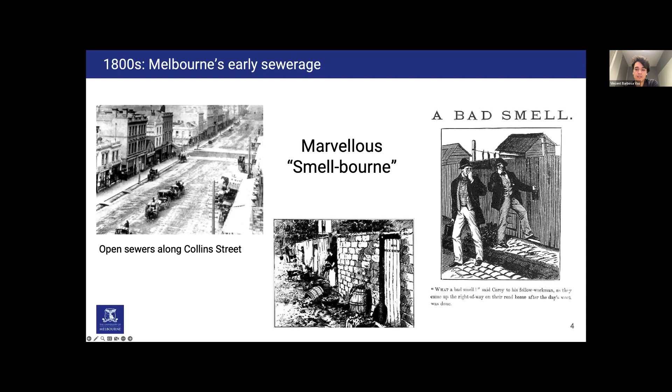Back in the 19th century, you wouldn't want to be living in Melbourne. Restrooms were located at the back of the garden, with a door that opens on the lane, and wastewater was directly dumped on the streets, creating the not-so-pleasant nickname of Smell-bourne. In fact, you can actually find the relics of these doors when you walk through the multiple lanes of Melbourne.

So Melbourne understood this problem, and in the 1800s, they tried to remediate it. We started to see thunder boxes, an early form of toilets located at the end of the garden. These boxes contained large buckets, which were accessible from the laneway by the nightmen. The nightmen started their job after dark and collected wastewater from the neighborhood.

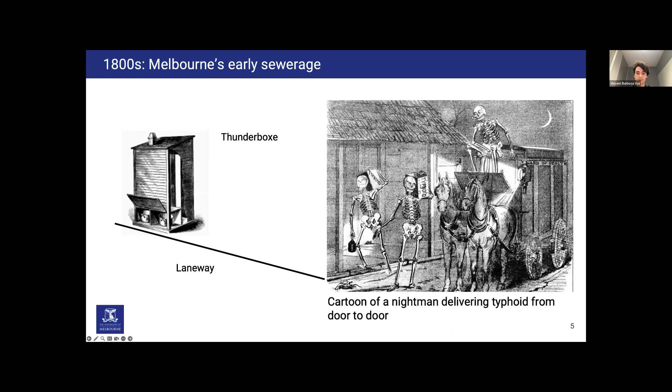While the nightmen helped keep cities safe from diseases like cholera or typhoid, they had a bad reputation. So despite the hard work, the disease would still spread, and this issue was attributed to them. Finally, in 1897, the All England Eleven Hotel became the first property to be connected to the sewage system, therefore putting an end to Smell-bourne, and Melbourne becomes marvelous again.

So I hope you now have a better understanding of the importance of a good sewage system.

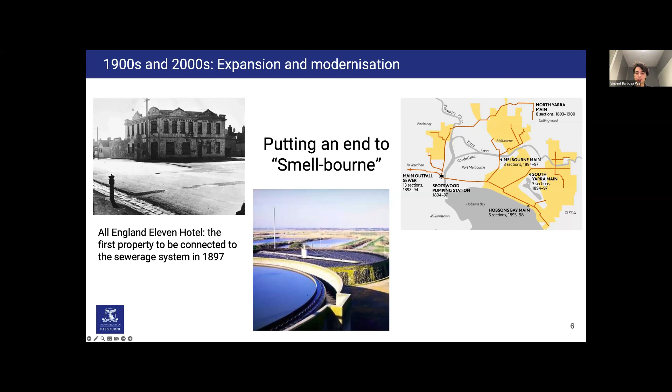There are two main types of sewage networks. The most common is gravity-fed. In a gravity-fed network, the wastewater from individual properties is carried along the main pipe to the treatment plant. Usually properties are located uphill and gravity does the job.

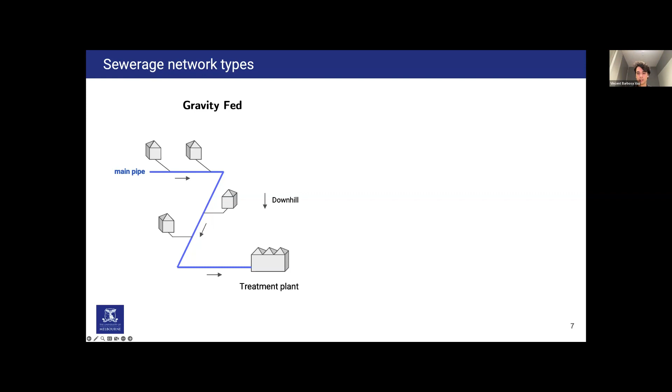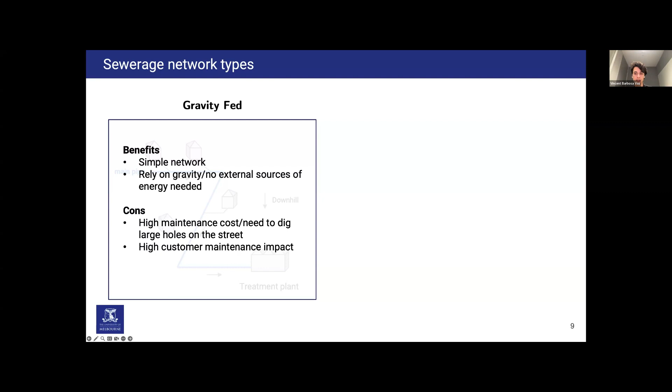Gravity-fed networks have many benefits. They are the most common type of network, and therefore well understood. They are also simple to operate, so as long as there is a slope in the right direction, gravity systems run themselves. However, they have high maintenance cost, as operators need to dig large holes in the street to repair broken or blocked pipes. This maintenance has a big impact on customers, as a large portion of the street needs to be closed.

The second type of sewage network is based on the pressure sewer system. A pressure sewer system is a network of pump stations used to collect and manage sewage from individual properties. Pressure sewer systems are used in areas with challenging topography, where the landscape is either very hilly or very flat, and in areas with regular flooding, or where it's impractical to install other types of sewage systems.

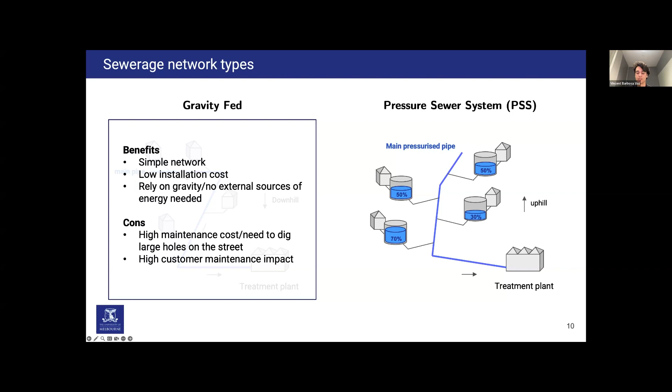Pressure sewer systems have a lower maintenance cost, as we need to dig smaller holes in the street. They also have a lower installation cost, as pipes can be smaller and buried shallower. They can be installed in challenging terrain, and they can easily be expanded. However, they are much more complex to operate than conventional gravity networks.

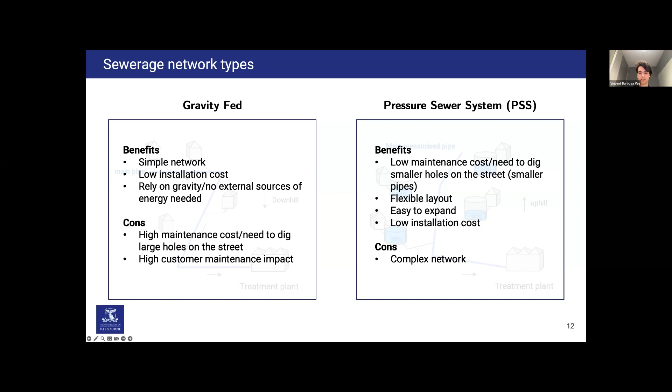In this talk, we're going to focus on the second type of network. The system is composed of a tank that is typically buried at the back of the house and connected to the main network in the streets. There's a controller that activates the pump located at the bottom of the tank.

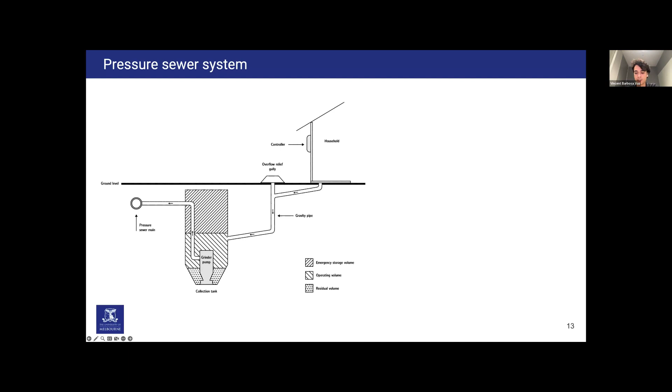In standard control systems, we simply wait until the tank reaches capacity and we begin pumping out. The wastewater goes into the tank, and when it reaches the set point or maximal level, it triggers the pump and we start pumping out. The wastewater is flushed into the main network until it reaches the minimal level and the pump turns off. We observe this cycle throughout the day.

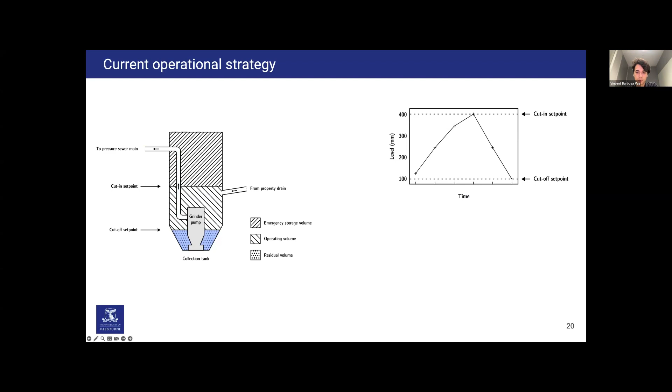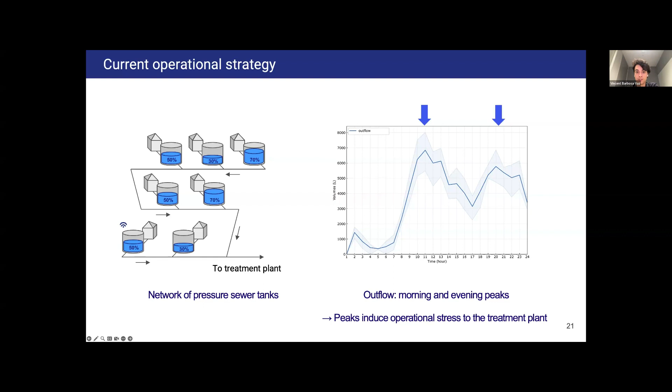Such simple control leads to peaks in sewage flow in the morning and evening, corresponding to peak water usage in the properties. Sewer systems are always designed to handle the highest peak flow projected in the network. Therefore, reducing the highest peak flow allows for smaller pipes, smaller treatment plants, and less chemicals used during the treatment process. There's a huge incentive to reduce the highest peak flow.

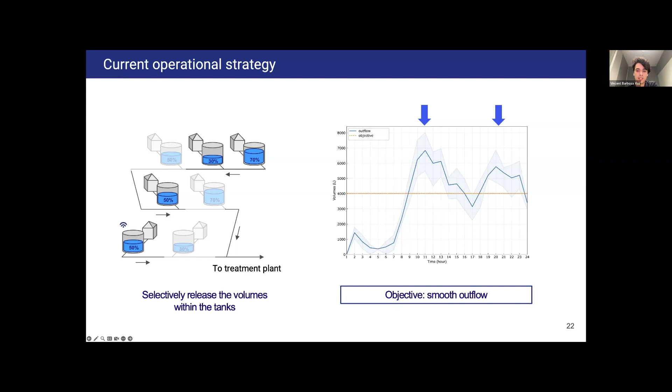So we formulate the following problem: can we selectively release the wastewater within the tanks at strategic times, such that the total output flow is smoothed out? In other words, we want to determine the times at which each tank should be emptied so that the highest peak flow is minimized.

To determine the times at which the tanks are flushed, we first need to determine the input flow - what and how much goes into the tank. We want to roll back all the previous pumping decisions that were made using the simple policy to retrieve the original input flow.

The tanks are equipped with sensors that measure the level of wastewater within the tank. Therefore, the amount of wastewater in the tank corresponds to the difference of two consecutive positive readings. We discretize the inflows into hour-long time steps so that we can solve this problem using an optimization model. We chose an hour-long time step as we don't observe any overflow for the selected tanks.

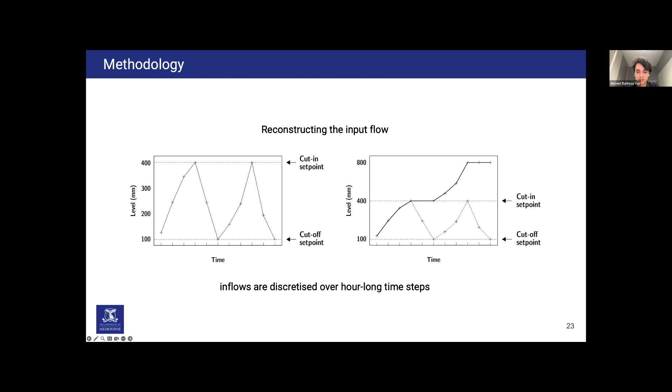We formulate a first MIP model. The level in the tank at time t corresponds to the level in the tank at time t-1 plus the inflow times our decision variable x: do we empty the tank or not?

We add a constraint such that the capacity of the tank is never exceeded. And we add a constraint to prevent wear and tear of the pumps by pumping out a minimal amount of wastewater.

In practice, such a model doesn't scale well, because for a large number of tanks, the solution space is very large, and the constraints require exploring a large portion of the solution space.

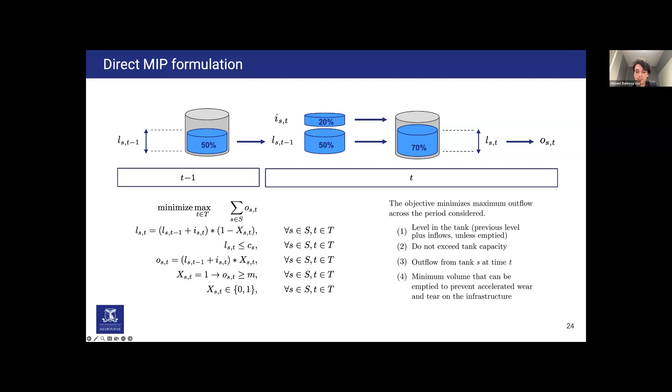So we move to a packing formulation. We can visualize the inflows as a stack of blocks that have a start time and height corresponding to the time and amount of wastewater entering the tank. The time steps correspond to the knapsacks, so each block can be packed in a knapsack during the time it is available.

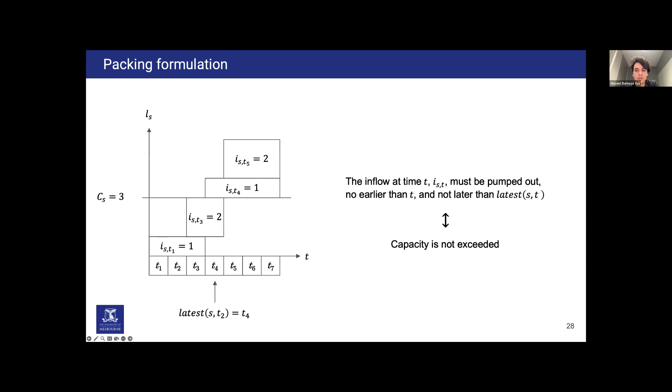We add the capacity of the tank - here it is equal to 3. We define 'latest' as the time at which the inflow must be emptied before exceeding capacity, so this can be easily pre-computed. Here, inflow 1 must be emptied before time 4. Similarly, inflow 2 must be emptied before time 5.

So during the search, we decide to empty the first inflow at time 3. So we define the following new constraint.

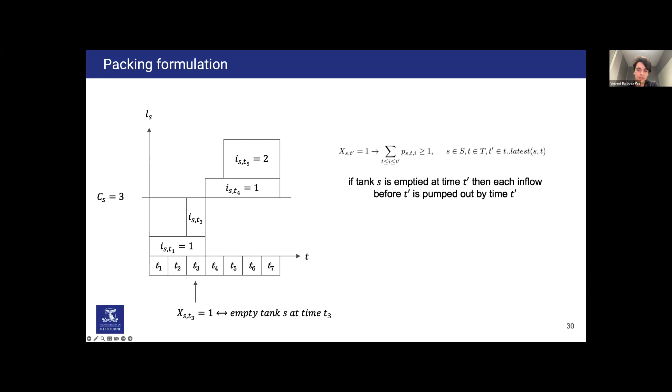If tank S is emptied at time t prime, then each inflow before t prime must be emptied by t prime. So from a physical point of view, we cannot have wastewater in 2 stages that is flushed out and that is remaining in the tank.

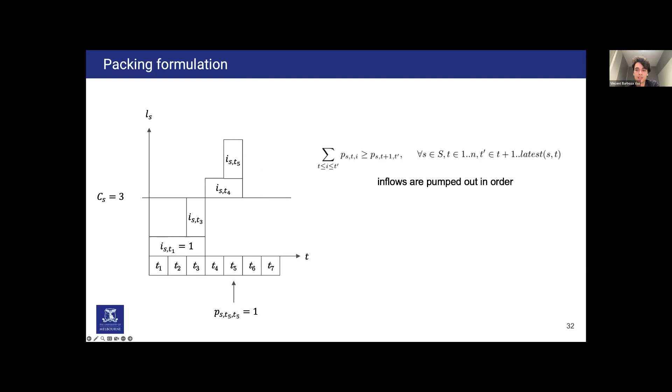Again, from a physical point of view, we cannot have inflow 4 being pumped out after inflow 5. So we define the following constraint to enforce that inflows are pumped out in order.

So far we defined a policy for pumping out. Because our decisions are made on predicted inflows, we observe a difference in the pumping out decisions based on the actual inflows.

The decisions are automatically revised by the controller that only accepts feasible decisions. That is, the system won't activate the pump if the tank is empty, and it will activate the pump if no decision for pumping out was generated. This corresponds to the normal controlling method.

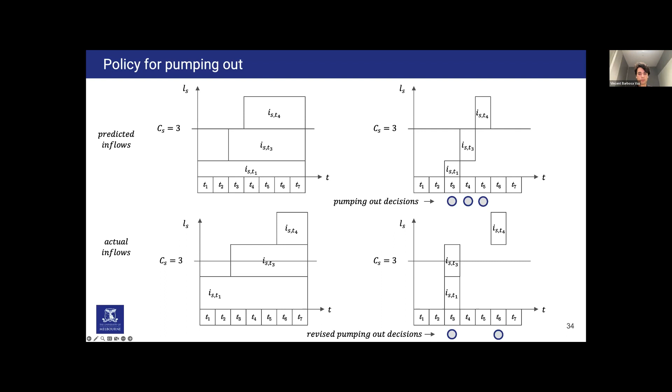We then define a set of non-predictive strategies. The first one corresponds to the current operational strategy, and that is our baseline. So a tank S is only emptied when it reaches capacity.

We also define a second strategy, that is we empty each tank as soon as it has more than the minimal capacity.

We also define a random strategy. So we compute the proportion of pumping out for each of the tanks. We flip a coin, and if we are below this proportion, we empty the tank.

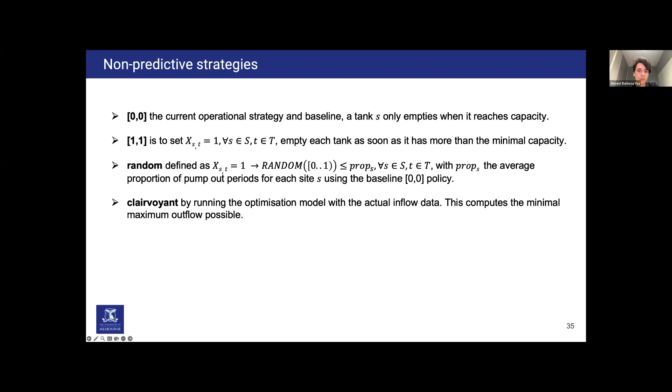And we also have the clairvoyant strategy, that is running the optimization model with the actual inflow data. So that is our target, which is the minimal maximum outflow possible we can get.

For the predictive strategies, we first use complex predicting models to generate plausible inflows. The issue with such models is that they tend to the mean and they do not accurately represent the underlying optimization problem that follows. So we lose the crucial information, which is the time the flow is peaking.

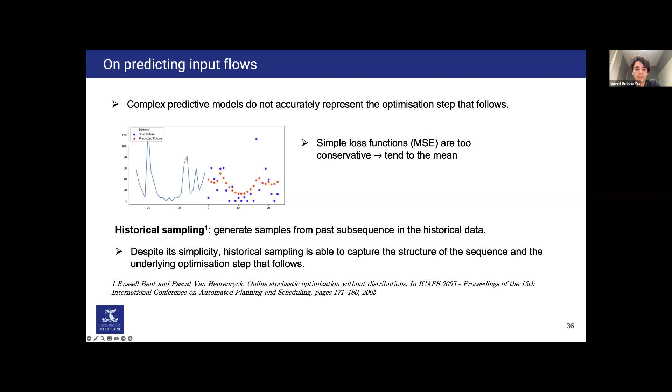Instead, we use a simple predictive method, which is historical sampling, by generating subsequences in the historical data. So we consider a sampling window, for example 7 days here, and we use one of the samples as our forecast.

We also define a robust strategy as the worst case scenario for the sampling window, which uses the maximum inflow for each time period over the sampling window.

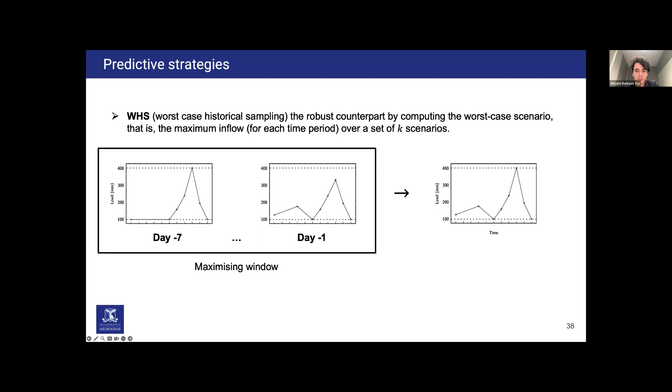So we use real data from our industry partner, and this corresponds to around 4,000 tanks. The prediction difficulty here is that we are considering a holiday area, so there's a huge fluctuation in water usage per household when people move from house to house.

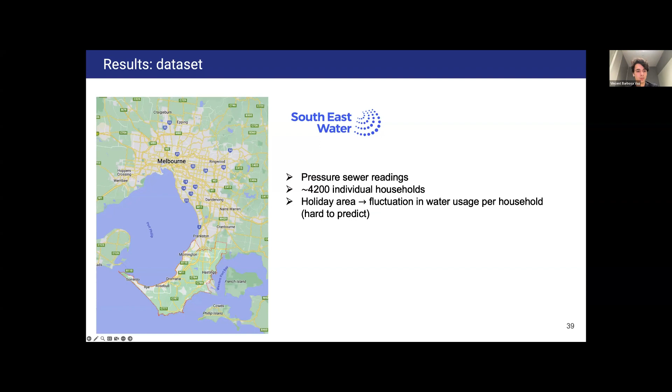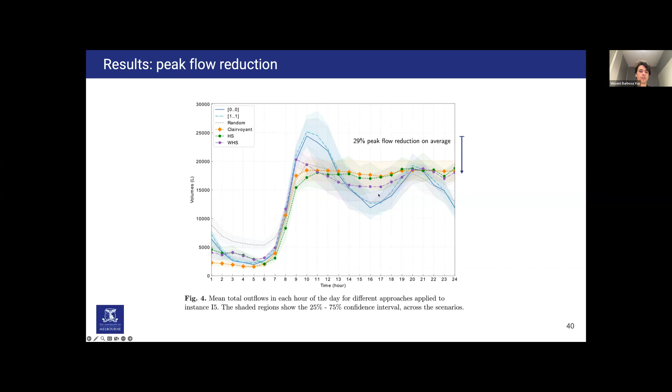So here are our results. In blue, you have the baseline strategy and the alternative strategy. And we can see that in orange here, you have the clairvoyant, so that's our target. Our method managed to considerably reduce the peak flow.

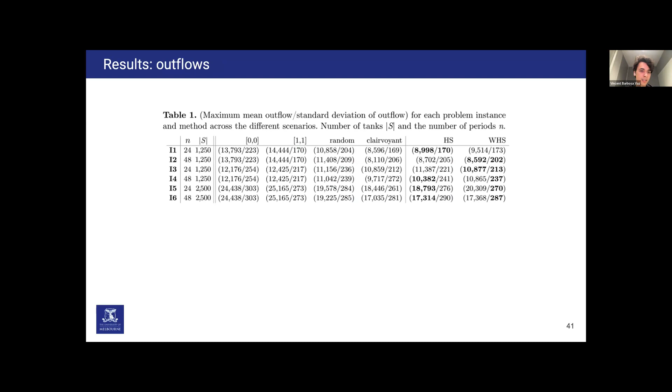So here are the results in more detail. We have the maximum mean outflow and the standard deviation outflow for each of the strategies. And we can see that there's a considerable reduction in peak flow available compared to the current baseline.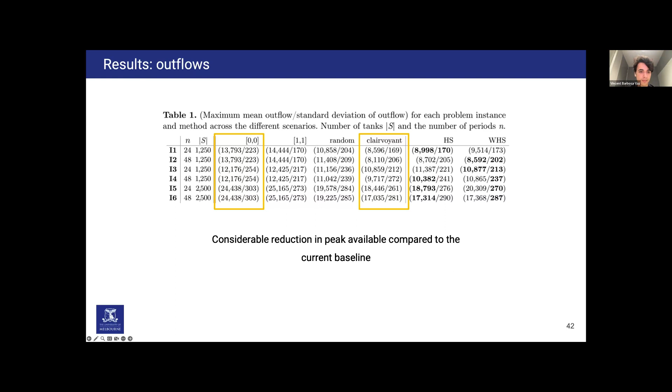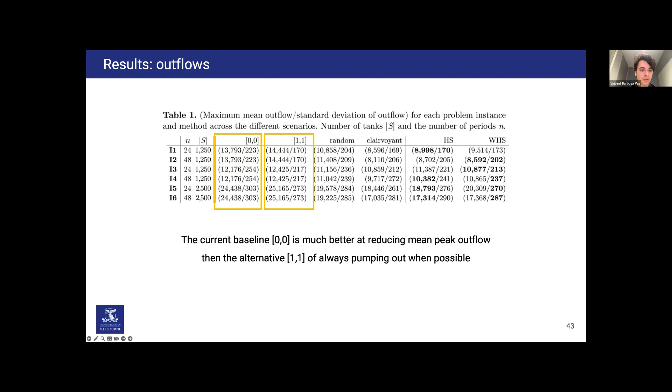Interestingly, the alternative strategy, which is always pumping out when possible, does not do much better than the original strategy. We can observe that the random balancing is quite an effective approach.

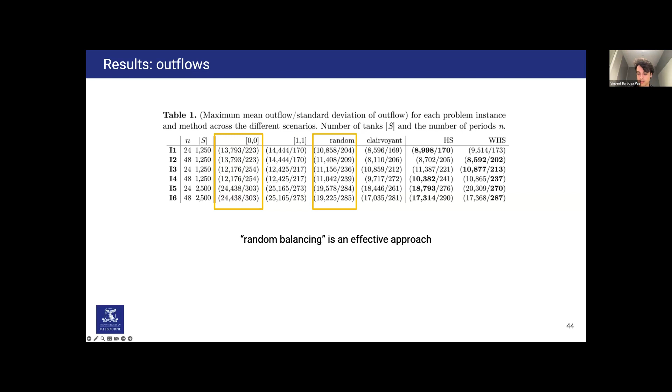Now comparing the historical sampling, we can see that the historical sampling method consistently performs better at reducing the peak flow. But the advantage of the weighted historical sampling method is that we can get more stable results with a lower standard deviation.

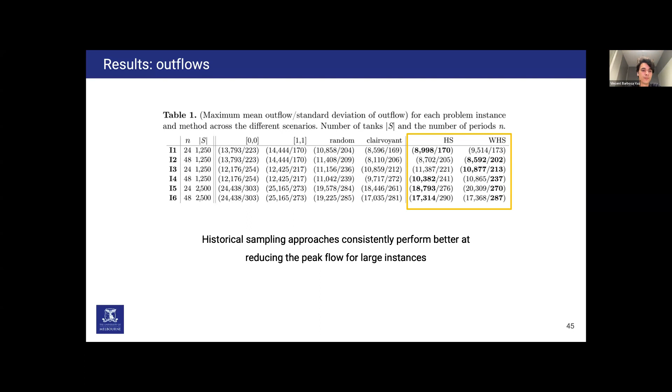So in conclusion, we introduced a novel practical problem from the water industry, which is controlling a pressure sewer system to reduce peak flow. We proposed two formulations, a direct MIP formulation and a packing formulation. And we showed that our optimization models can significantly reduce the peak outflow compared to the current operational approach.

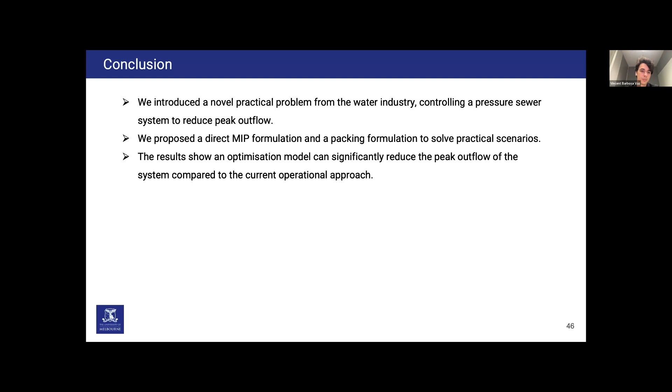As future work, we plan to take into account more realistic features of the network, which is the distance of the tanks from the sewer treatment plant. And from an optimization point of view, we plan to investigate decomposition approaches such as column generation, since the tanks are only weakly coupled by the objective.

And ultimately, we want to investigate end-to-end predict-plus-optimize approaches. Thank you.